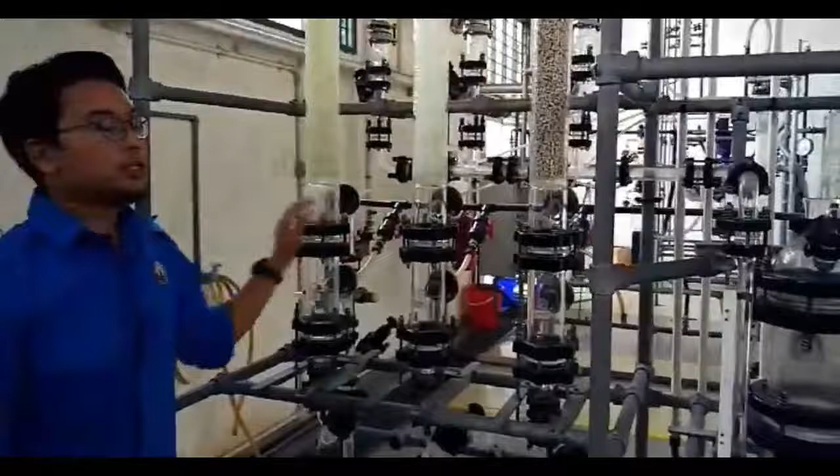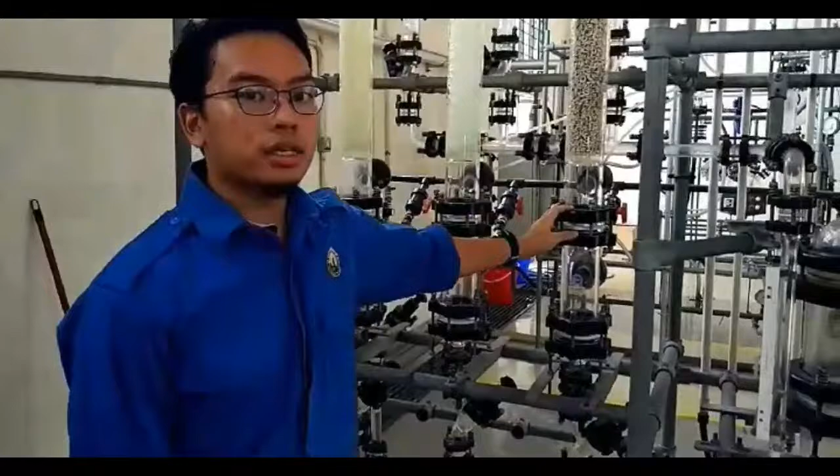Now we have three different types of packing. They vary in terms of structure and density. The first one is Raschig rings. The second one is also Raschig rings, but this is smaller. And then the third one is the Berl saddles.

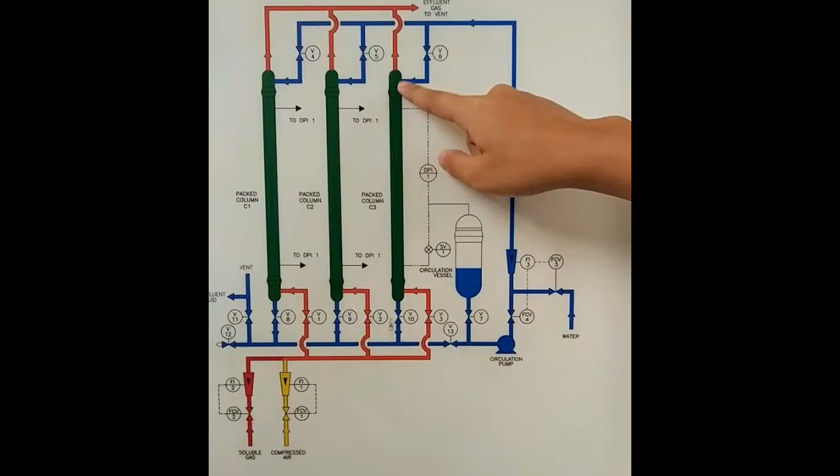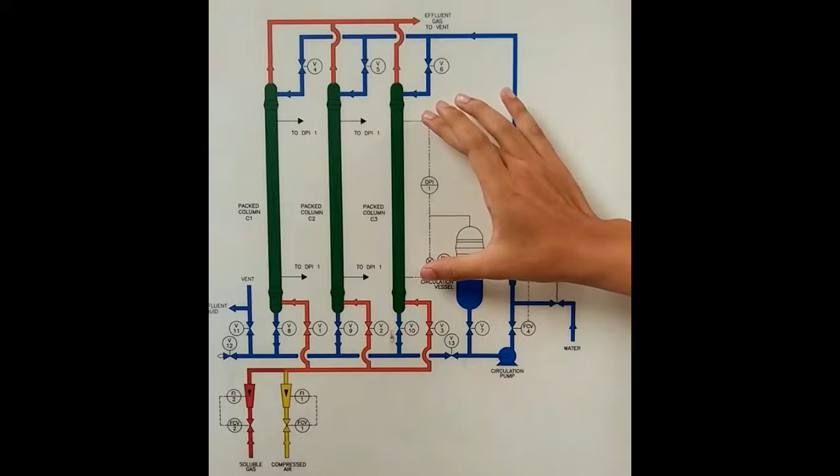We experimented on this. Gas absorption will be taking place in a packed column absorber. First, water is taken by circulation pump to the top of the packed column, so it will flow downwards by gravity. Then we will also have soluble gas, which is carbon dioxide, into the bottom of the packed column. The carbon dioxide will flow upwards as it is gas, and in this packed column is where absorption of carbon dioxide into water takes place. We'll be moving on to how we set up this experiment with my friend Zaki.

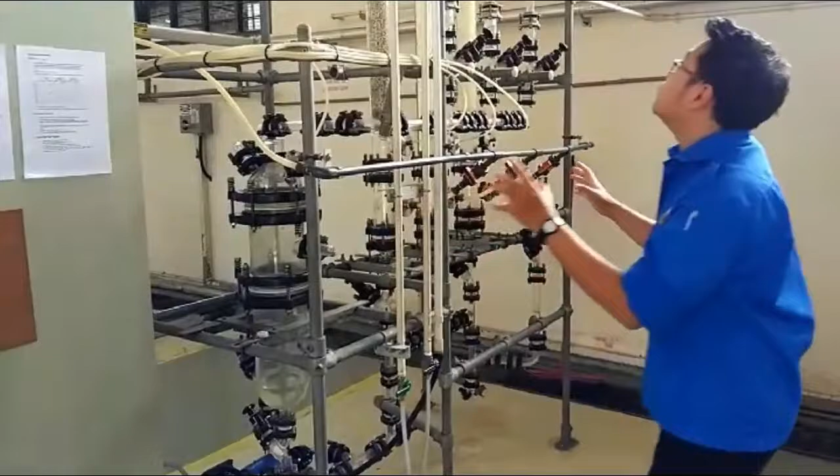Okay, my name is Muhammad Zaki bin Zulkifli, and I will take part in the setup procedure for this operation unit, which we call the absorption unit. First of all, we must fill the water into the cylindrical recirculation vessel until the satisfactory level, until here, where it is supposed to be. After that, when the tank is full with water, we close the source of water, and then we go to this valve.

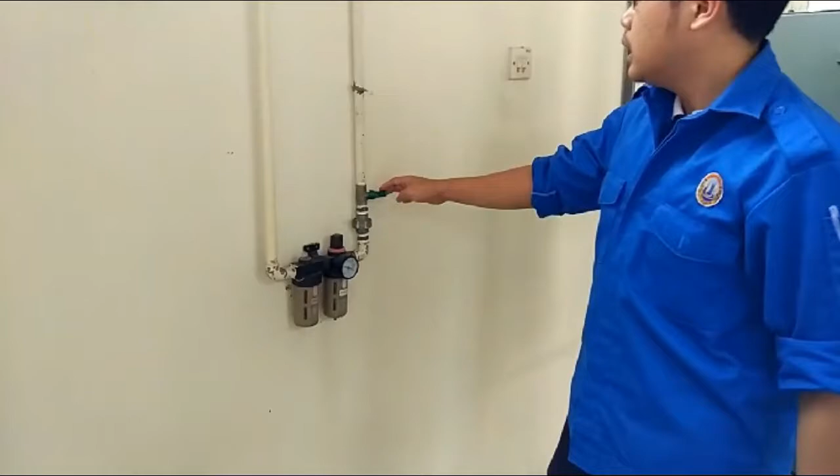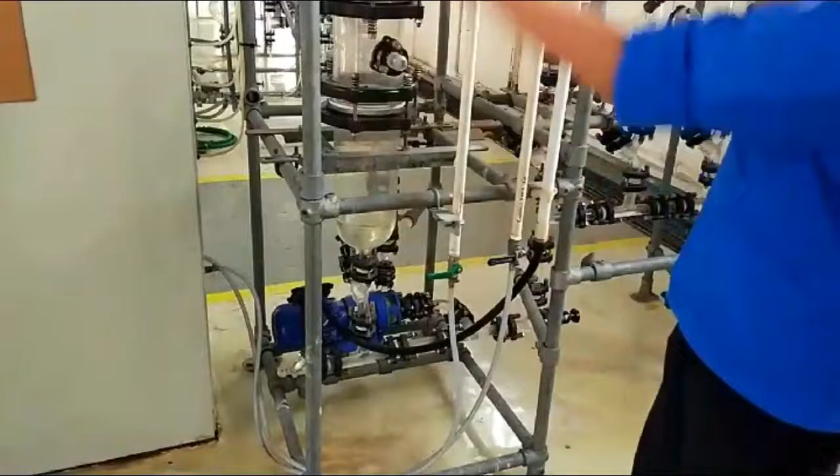This valve must be open, because this will make the air flow into this absorption unit. So we must turn it on, and then after the air has entered the absorption unit, we must turn this switch on. This switch functions to turn on this water pump, to ensure that the experiment will be conducted by this pump.

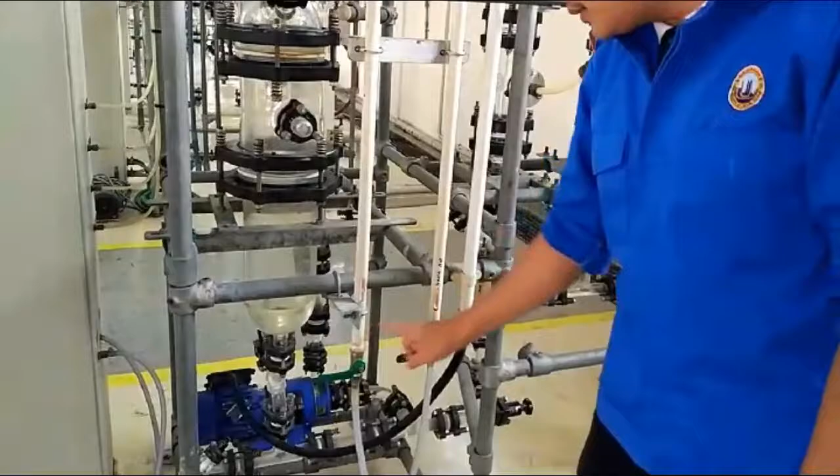And lastly, after operating the pump, we should make sure these two valves for compressed air and carbon dioxide are open to make the air flow over the gas absorption unit. So that's all my job, and I will transfer to Hazim, my friend. He will continue the last part.

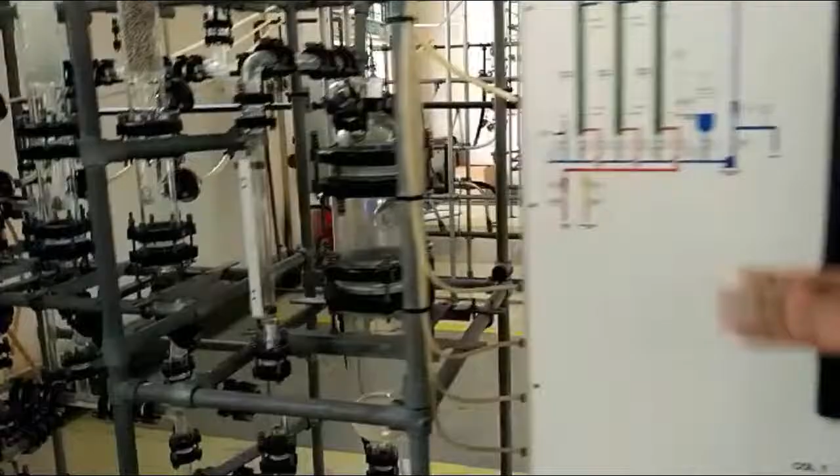Assalamualaikum. I am Hazim, and I will explain how the experiment should be conducted. First, we have to make sure that the water flows steadily, at 1.5 liters per minute. We also have to make sure that the CO2 flow and the air flow are stabilized. After doing all those things, we will collect the sample at the bottom product every 5 minutes. The collected products will be sent to the small lab over there for the titration method.

Assalamualaikum warahmatullahi wabarakatuh. I'm Nur Hatika binti Muhammad Yusuf, and this is my friend. I'm Nur Awatif Humaira. The purpose of the gas absorption experiment is to determine the amount of unreacted NaOH with CO2. To analyze this, we need to use the method of direct titration. Both of us will explain how to do the direct titration.

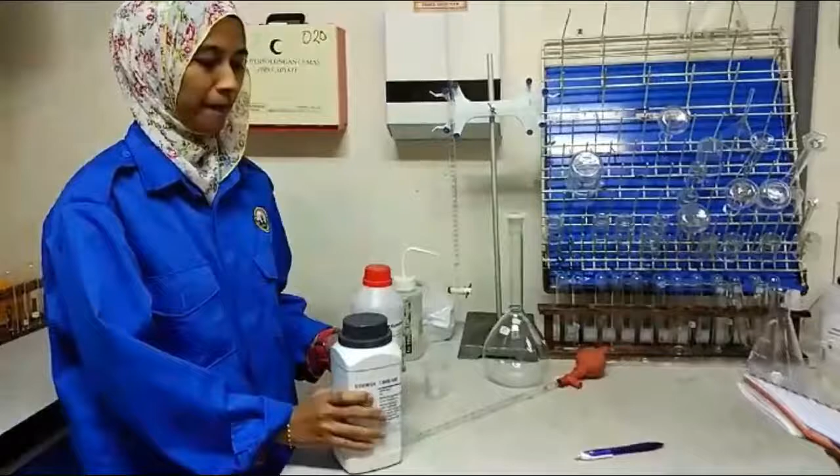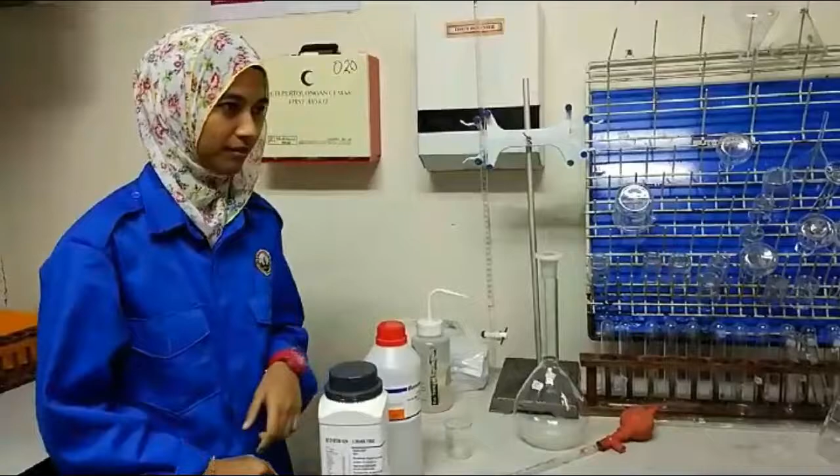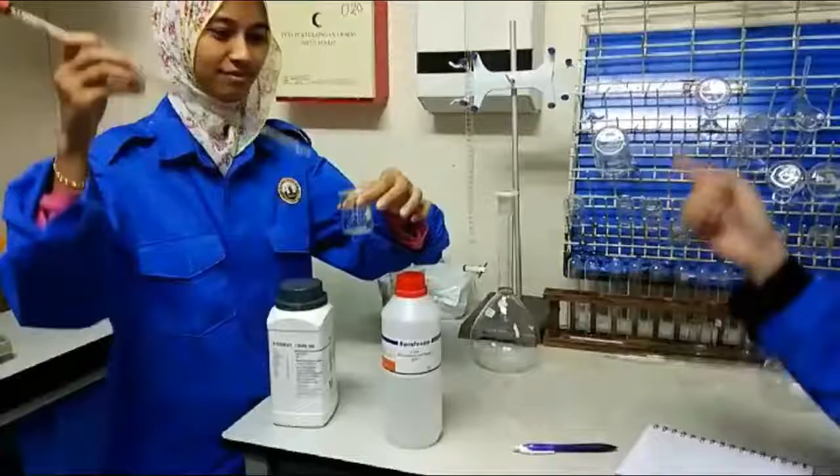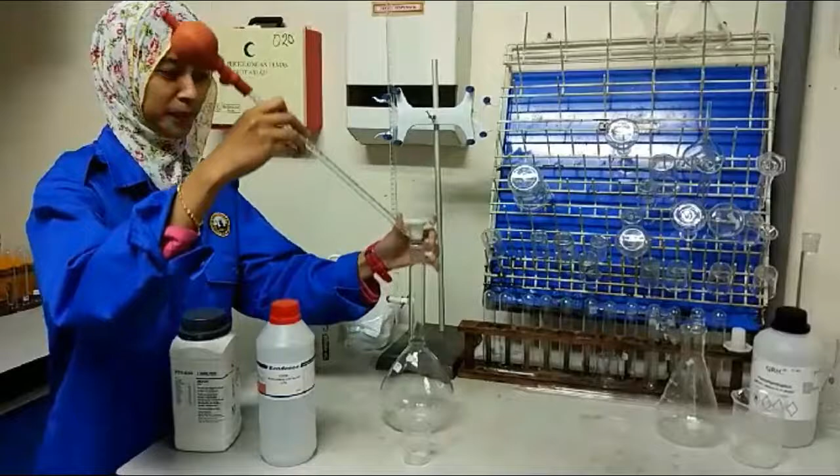Before starting the titration, we need to prepare the standard solutions, which are HCl and NaOH. To prepare the standard solution of HCl, we pour 10 ml of HCl into the 50 ml beaker. Pipette 10 ml of HCl solution into a 1000 ml volumetric flask. Next, add deionized water up to the mark level of the volumetric flask and shake the solution for a while.

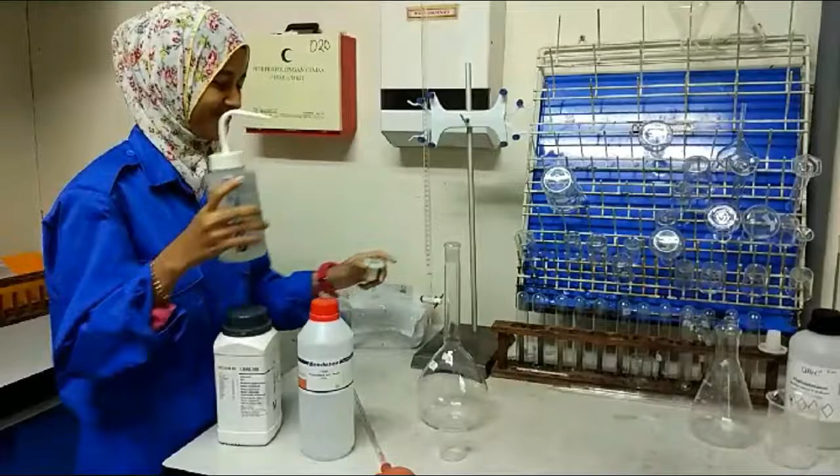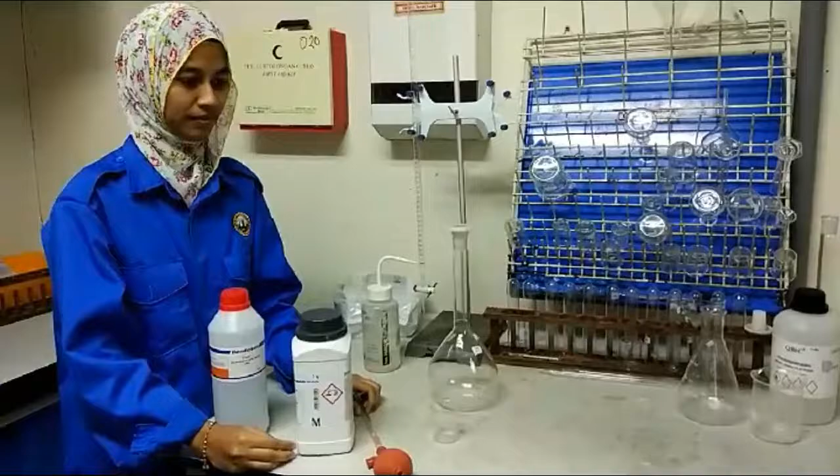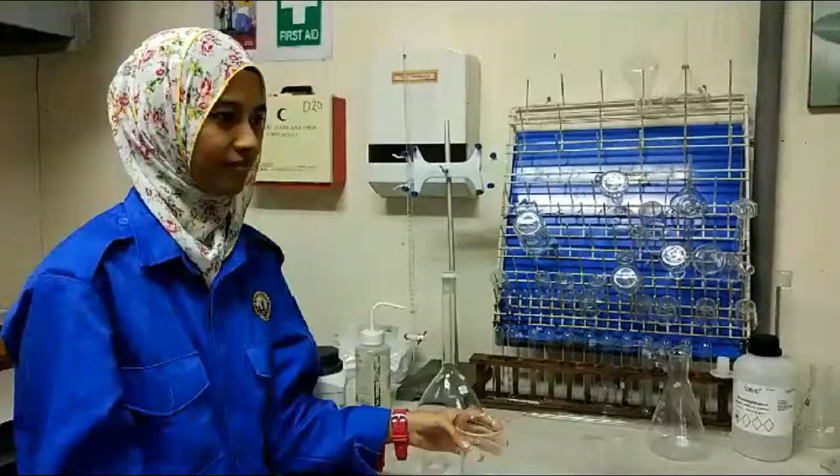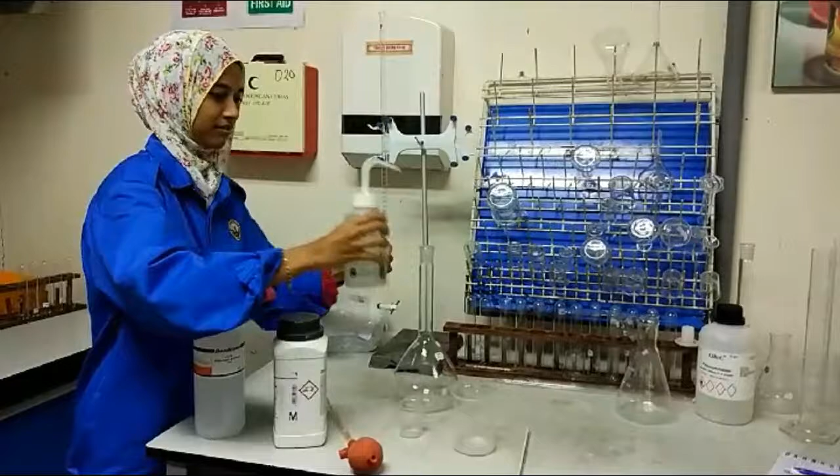To prepare the NaOH standard solution, we need to weigh 0.4 gram of 40 g/mol NaOH pellets. Then pour it into a 100 ml beaker. Stir the NaOH to dissolve. Pour the dissolved NaOH into a 1000 ml volumetric flask. Then add deionized water up to the mark level of the volumetric flask and shake it for a while.

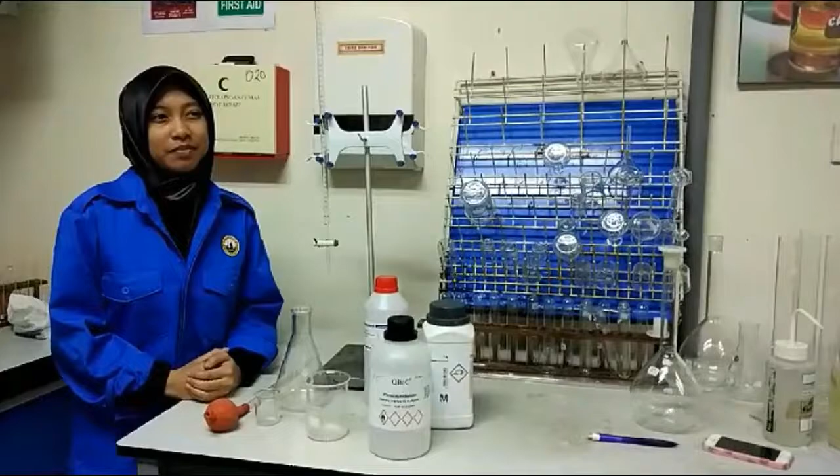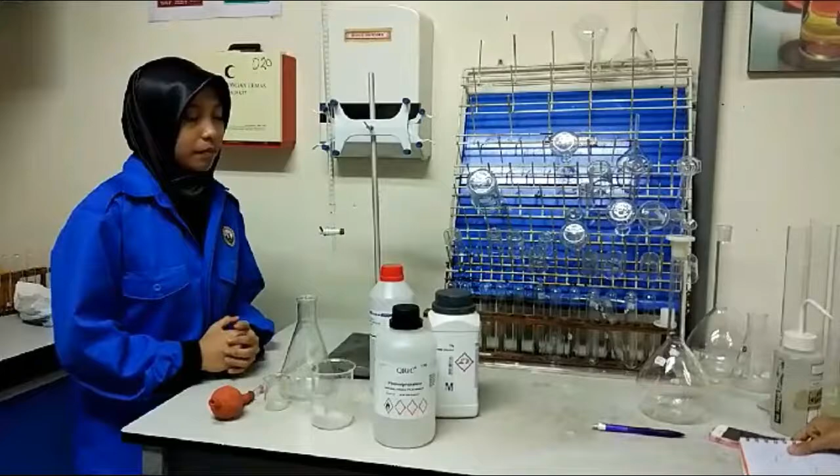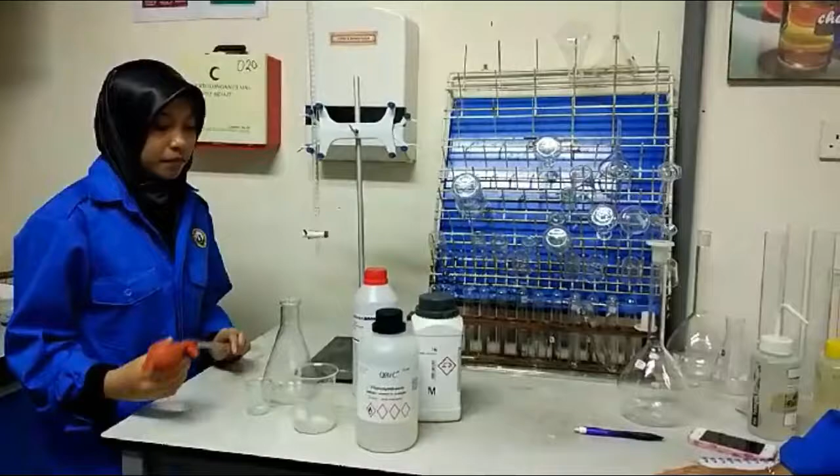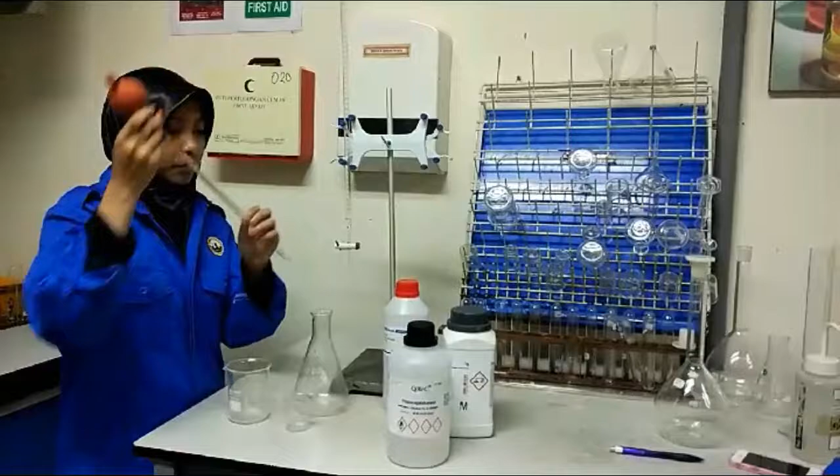After running the experiment for about 20 minutes, we will be extracting the sample. Every 5 minutes, a sample is taken from the experiment. We will start the titration. 10 ml of the sample is pipetted into the conical flask. After that, for the dilution process, 30 ml of the NaOH standard solution is pipetted into the conical flask. The standard solution of HCl is filled into the burette to full capacity.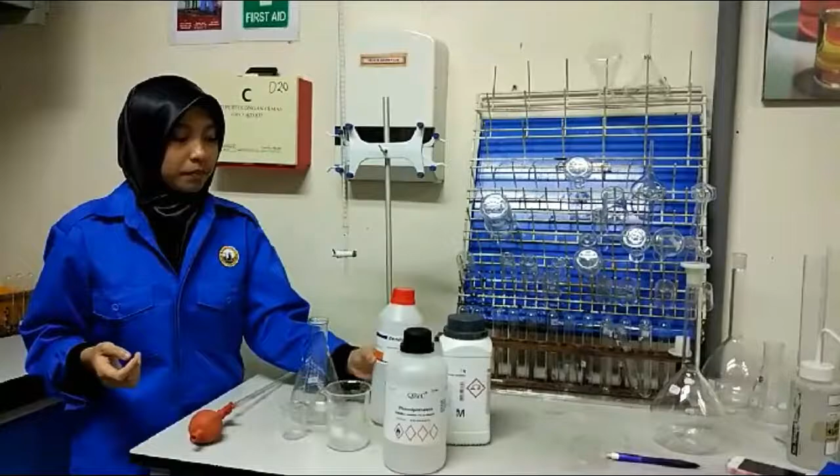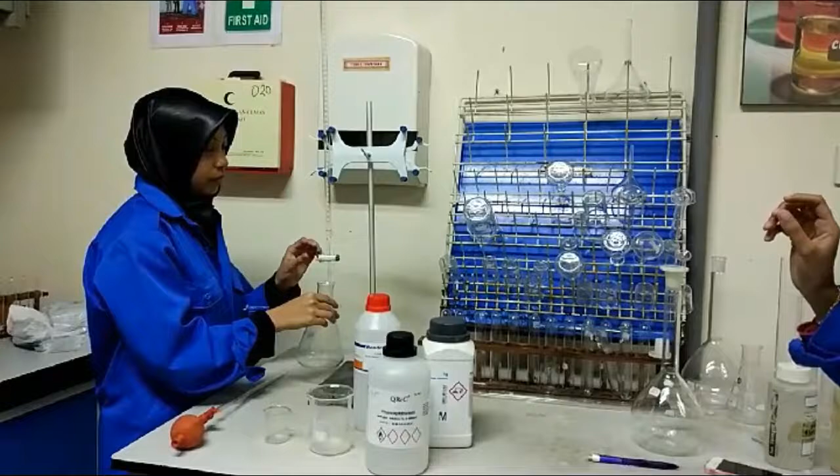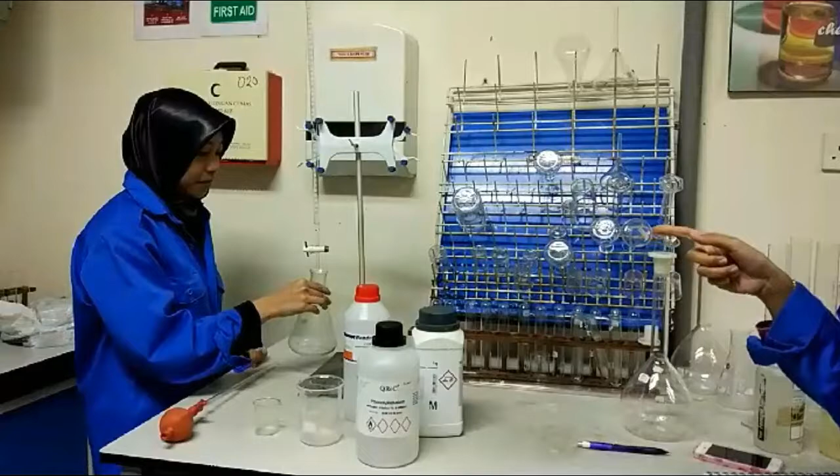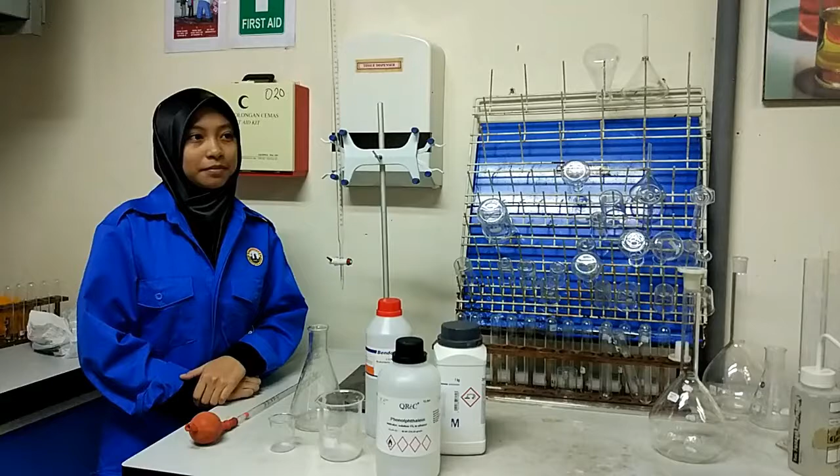And we start the titration process. We open the valve of the burette and let the HCl flow drop by drop until the solution in the conical flask turns pale pink. After that, stop the flow. The titration process is meant to determine the amount of unreacted NaOH with CO2 in the sample mixture.